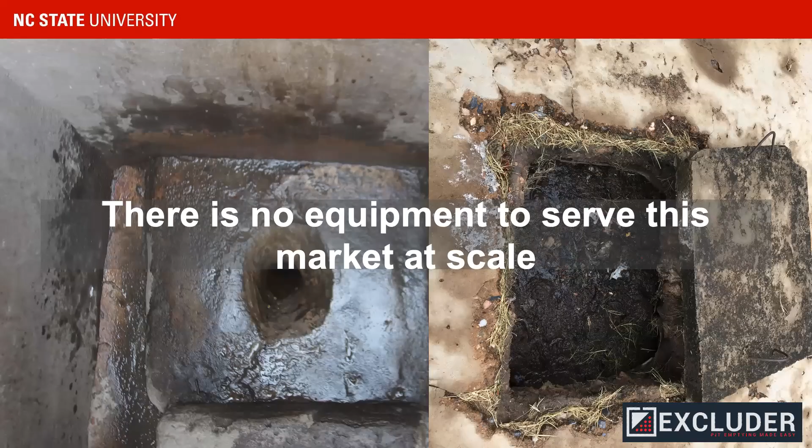The reason people are forced to empty with buckets and shovels instead of mechanical pumps and vacuum trucks is primarily due to two reasons. The first is that vacuum trucks might not be able to access the pit latrine, since these septic tanks and latrines can be in very dense peri-urban areas with very narrow pathways, so getting machinery near the site for emptying can be quite difficult.

The second reason, and it's a huge one, is that a lot of these pits are filled with solid waste. You can see this operator here manually emptying a latrine in Kenya, holding up a large piece of cloth. In the absence of a way to remove trash, emptiers are pretty much forced to remove the sludge and contents of the pit by hand.

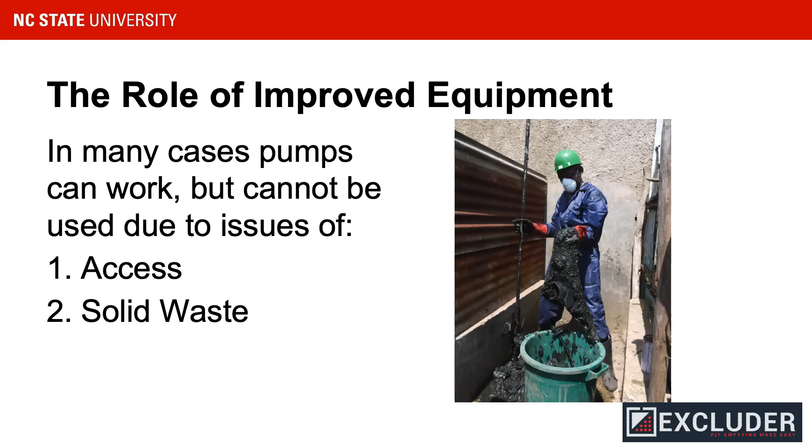So what's our solution? NC State created the Excluder, which is a patented pump accessory. It hooks on directly to a pump hose and removes fecal sludge. The device itself does not pump directly - it's important to note that. This unique rotating head, shown here in close-up, is what actively keeps trash out so that it doesn't end up clogging machinery. Since it attaches at the end of a hose, we're able to better access pit latrines and septic tanks in narrow spaces, allowing for a mechanical means to service these pits.

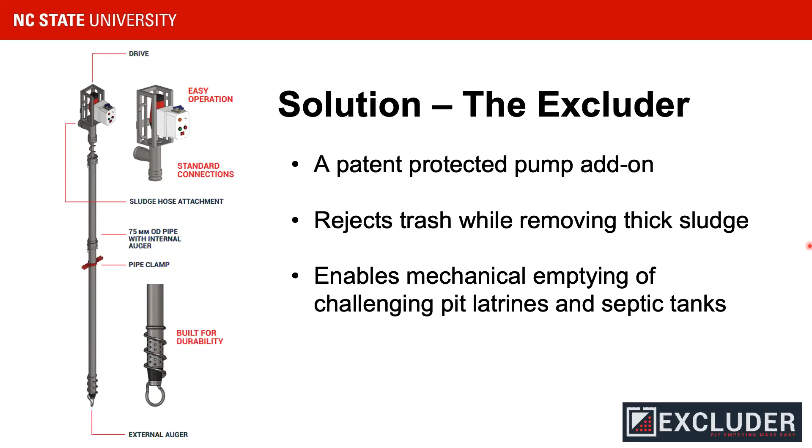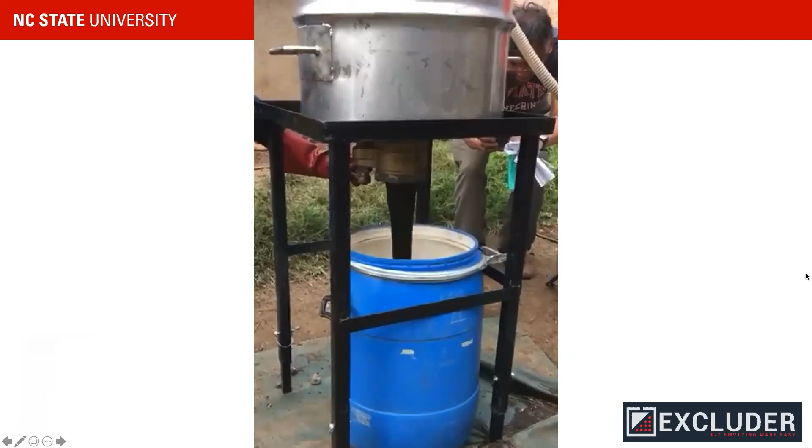So this is a video of sludge that we collected through the Excluder in Kenya, and you'll notice that the sludge is smooth and free of trash. The fact that there's no trash makes it easier for downstream processing. So as far as sludge goes, it's pretty clean.

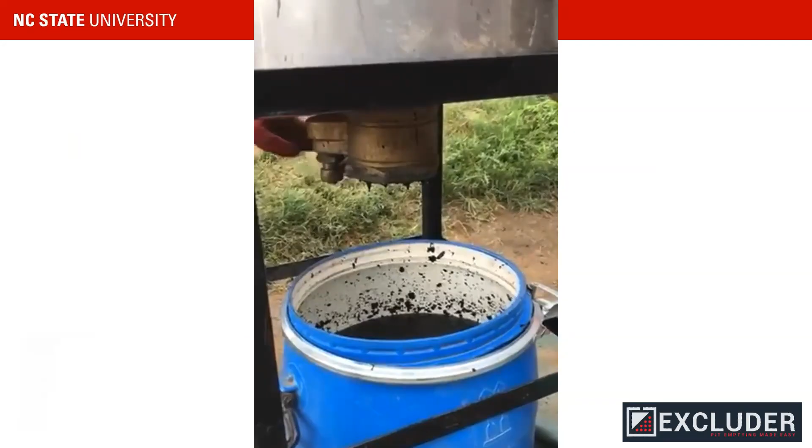So how's the device used? There's two ways. The first way is that it can link directly to a vacuum truck. The advantage here is that the excluder widens your customer base. Pits that were previously off limits are now able to be emptied.

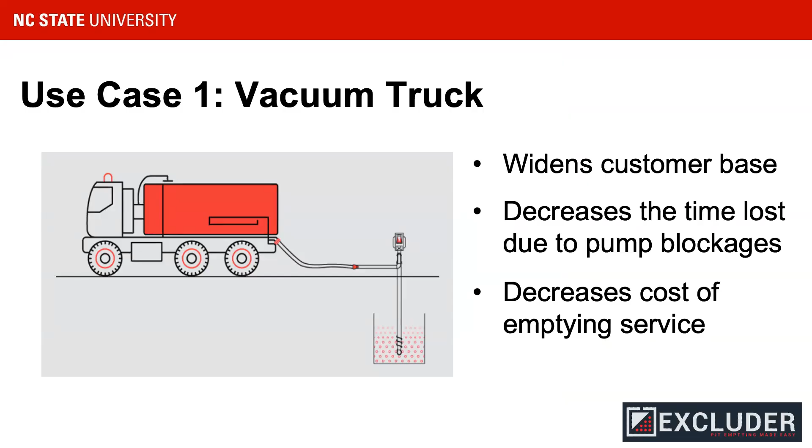The excluder prevents blockages and reduces time needed for fishing, leading to lower emptying costs. The next case, a much newer use case, is linking it to an off-the-shelf pump. The advantage here is that an emptying company no longer needs an expensive vacuum truck to service pits. Including a pump, a pickup truck, and a storage tote, in total it costs less than $20,000, and you can start removing fecal sludge.

Alongside with the folks that have a vacuum truck, if your team wanted to rent a truck instead of buying one outright, a business can start using this method for far less than $20,000. We're especially excited about this configuration since it's a much cheaper option for the public, and it makes people a lot less reliant on manual emptying.

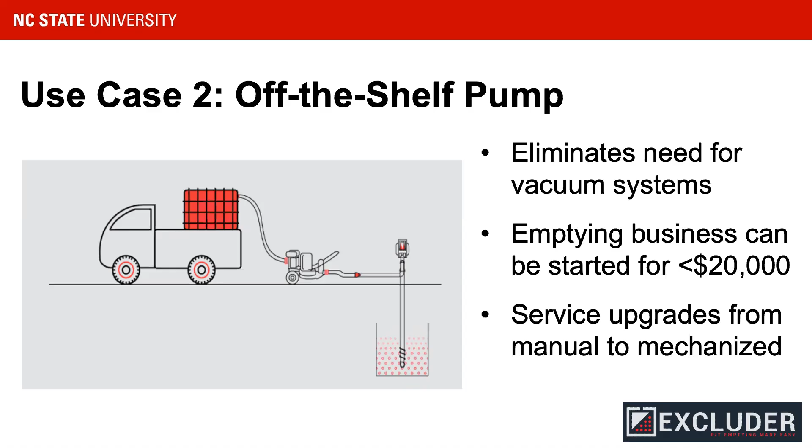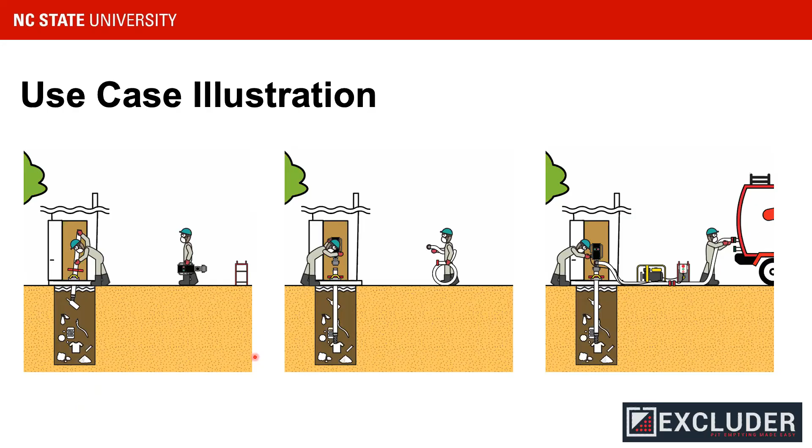And of course, if this was with a pump, this is where the pump would connect. Once you have a source of power and a pump or vacuum source, you're good to start going. Sludge is extracted over time, and then goes directly into your truck or storage tote.

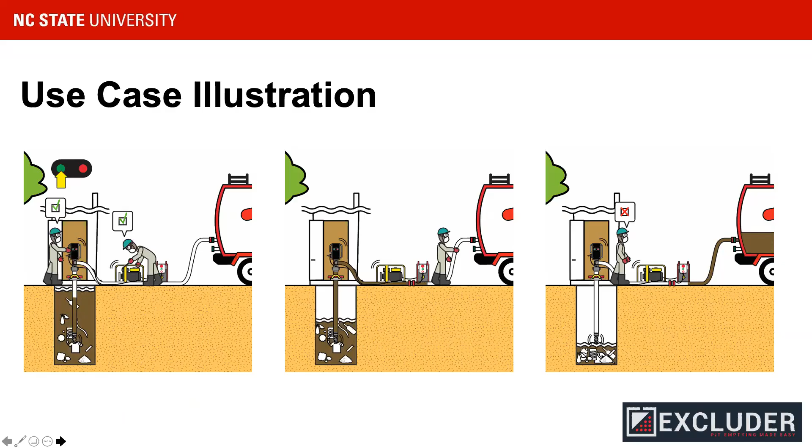The main shaft of the excluder is about 2 meters long. You'll notice there might still be some sludge and trash a little bit beyond reach, depending on the depth of your latrine. What we have here is actually a 1 meter extension so you can attach it towards the bottom, reach the bottom of your pit better, and extract the sludge directly.

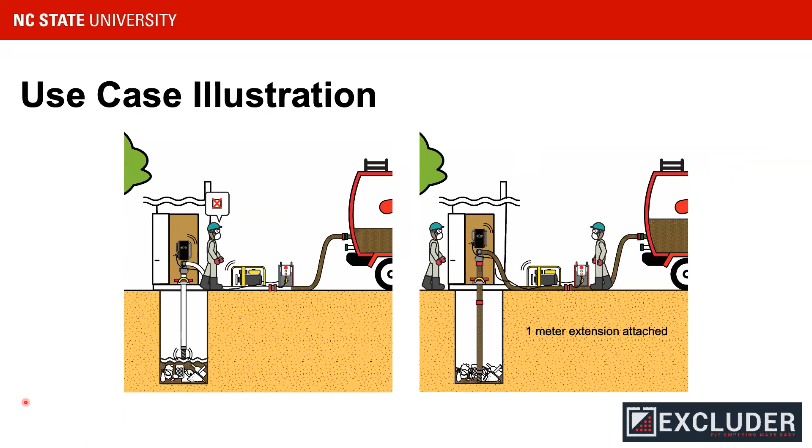What we found is that by consolidating trash at the very bottom, it creates a new service. So for an additional fee, a sanitation team can remove the trash at the end of emptying and argue that trash shouldn't be disposed in the pit in the first place. This puts a cost to the customer for solid waste that's been improperly thrown into the pit. And of course, it's up to the service provider to determine how to charge for trash removal.

We worked with a pit emptying team in Madagascar where the company told its workers that individual employees on site can offer to remove trash. If a customer agrees, those employees can keep that fee to themselves. We've heard that customers have been willing to pay for this extra service.

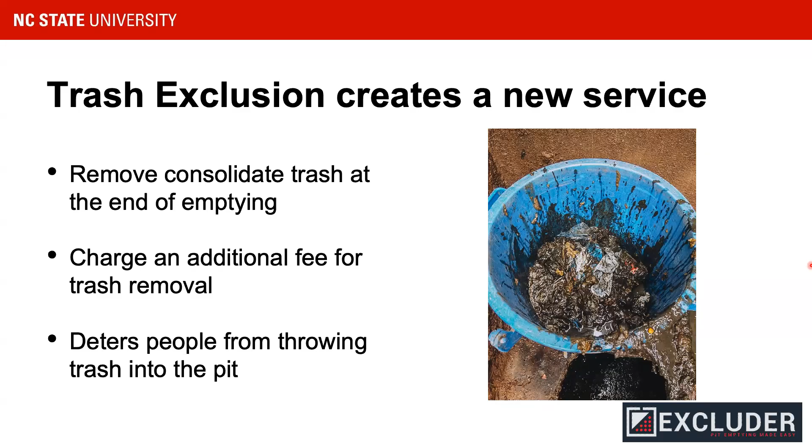So with that, I think there might be some questions about the exact product specifications. I'll hand this off to Sarah, and she'll walk through the details of the device along with the expected market for the excluder.

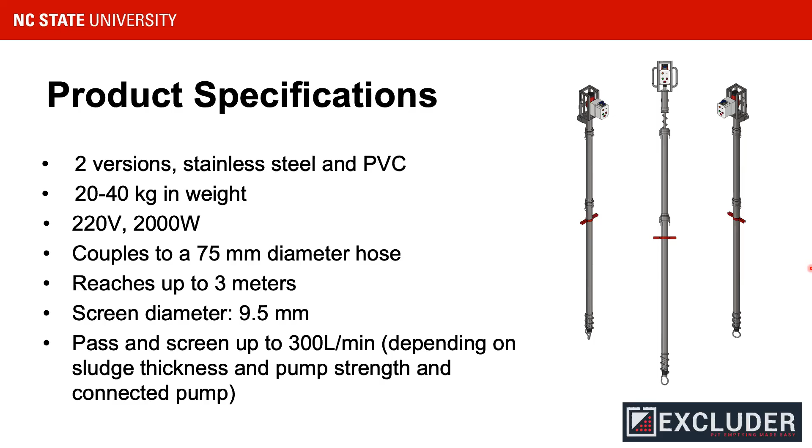So to date, we've pilot tested the excluder in 8 different countries in sub-Saharan Africa and Southeast Asia, and have incorporated service provider feedback into each of our 4 prototypes to improve the function and usability of the excluder. Across our pilot sites, we've removed approximately 70,000 liters of sludge safely from 75 on-site facilities and provided over 500 people with access to safer emptying service provision.

Our current manufacturing partners are based in India, but are only capable of low volume production, so they have carefully documented the manufacturing processes for a smooth handover to a larger manufacturer. With a low volume of units being produced, we estimate the stainless steel model to cost between $3,000 and $3,900 USD. This price has fluctuated significantly during COVID, partially due to the price of stainless steel. Our PVC model costs approximately $2,500 to $3,000 USD. However, both of these costs should come down considerably once manufacturing is done in larger volumes.

In 2020, the excluder won the Patents for Humanity Award from the US Patent and Trademark Office, and we have another patent currently filed for our latest product version. In addition to winning the Patents for Humanity, the excluder has also won RELX's 2018 Environmental Challenge, which recognizes exceptional projects annually that set a benchmark for innovation, involve local communities, and can be scaled to address urgent water and sanitation challenges.

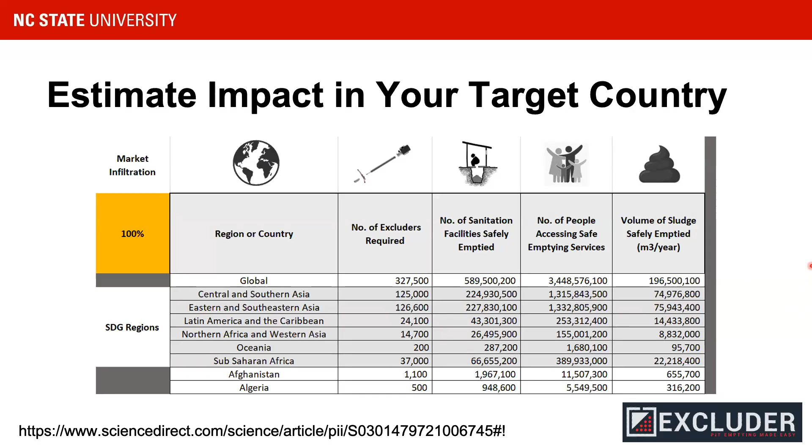So to zoom in and give an example using the calculator, we looked at 2 high priority regions for emptying service provision. We selected Eastern and Southeastern Asia due to the area's high population numbers and concurrent high number of on-site facilities. Sub-Saharan Africa is of interest due to the region's need for improved sanitation services of upgrading from manual to mechanized service provision. The estimates shown were calculated assuming a 15% market infiltration rate of the total on-site sanitation market. And as you can see, the impact numbers are high. Using 5,500 excluders across Sub-Saharan Africa, you could provide safer emptying services for over 58 million people.

So we know the excluder has a lot of promise for creating more dignified jobs for service providers and improving community health. But what about the market opportunity? The Bill and Melinda Gates Foundation sponsored a third-party market assessment where neither North Carolina State or Triangle Environmental were involved. Sanitation experts were consulted to provide realistic assumptions for the model.

The model calculates the business case for manufacturers specifically. Estimates were made to calculate the percent of the obtainable market, or the market which could be reached. Both excluder use cases were investigated, and it was estimated that approximately 50% of the exhauster truck market and 30% of the off-the-shelf pump market could be obtained. The off-the-shelf pump obtainable market is lower because it is still emerging and requires development in policy, regulation, business investment, formalization, and behavior change, along with others.

These obtainable market percentages were used as part of a sensitivity analysis to estimate the expected profitability or value of the excluder to manufacturers. And so the good news from the third-party market assessment is they did find that there is a profitable business case for manufacturers.

It's important to note if the manufacturer is able to partner with a large NGO working in the emptying space who can help increase uptake through subsidies, investments, marketing, education, behavior change, and regulation, that obtainable market will be much higher. In addition, as that emerging market of fecal sludge develops, there will be growing opportunity to create higher impact and grow a larger profit.

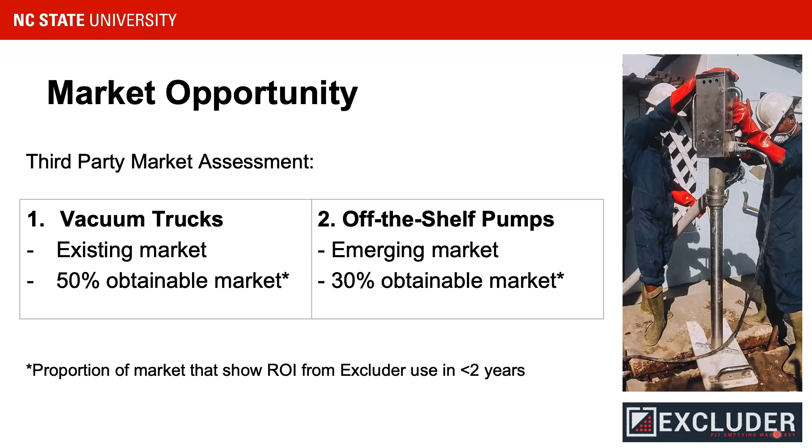This third-party market assessment went into a lot more detail, and the profitability does vary by different geographic regions. So if you're interested in learning more about your specific market opportunity, please reach out to us after the webinar for more details.

So in summary, not only does the Excluder offer a profitable business case for manufacturers, it also provides a technical solution to service challenging pits, which are inaccessible to exhauster trucks or contain high volumes of trash or thick sludge. The Excluder can help professionalize and dignify an essential industry by providing upgrades from manual to mechanized emptying service provision, and it can also improve public health and working conditions by decreasing the contact both service providers and communities have with untreated sludge.

So our ultimate goal for the Excluder is to find a commercial partner or a network of partners that will champion the Excluder and bring it to market. We are currently in conversations with some potential commercial partners in different geographic regions, and we are seeking more private companies interested in expanding their own product portfolios to include the Excluder. Complementary to commercial partners, we're looking for market access partners, customers, and funders who can help open this emerging market.

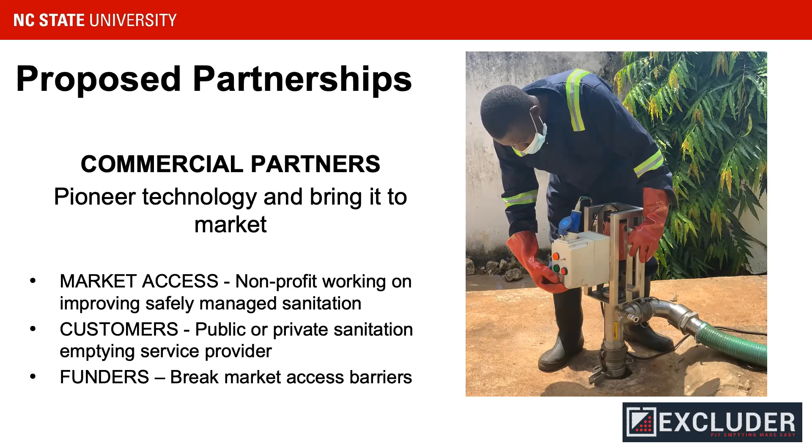If you are interested in learning more about becoming an Excluder commercial partner or champion, please reach out to us. You can reach us at info@excluder.net, or you can fill out our contact form on our website.